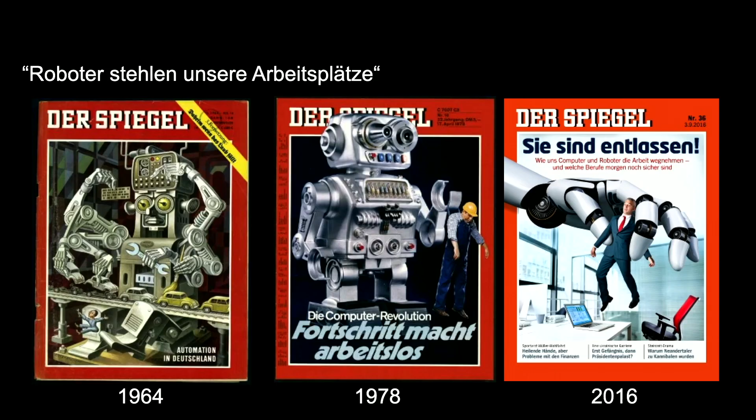I always like to show this picture because Jan Böhmermann had a show where he copied my picture basically, so I have to keep it in my talk. He was kind of not getting the actual content of the slide, meaning that we have been revolutionized and run out of jobs in 1964 by robots, 1978 by robots, 2016 by robots, and I think we all know this has not happened.

So there has always been this myth that we, roboticists, build machines that steal jobs. And I think it's very clear that robotics, especially this new age of robots, is doing a very different thing.

So we're having more the idea that instead of having the classical automation in the 2000s with humans being isolated, not being part of the machine world, now we kind of tear down the safety fences more and more. Obviously, it's not going as fast as we all hoped.

There is many things you could now criticize about standards and so on, and we all know that they are extremely conservative. There's also things that are not really how they should be, but I guess there's a lot of will to push that forward. And more collaboration, so cobots can come into existence, but in the end, what use is it if a cobot is not doing something new?

So what is this new thing? If you look at the industrial robotics chain over the last century almost, starting from Gargantua, then going into the industrial robotics generation, the first generation of position-controlled machines - obviously I have left out a lot of robots, so please don't be offended if I missed your robot.

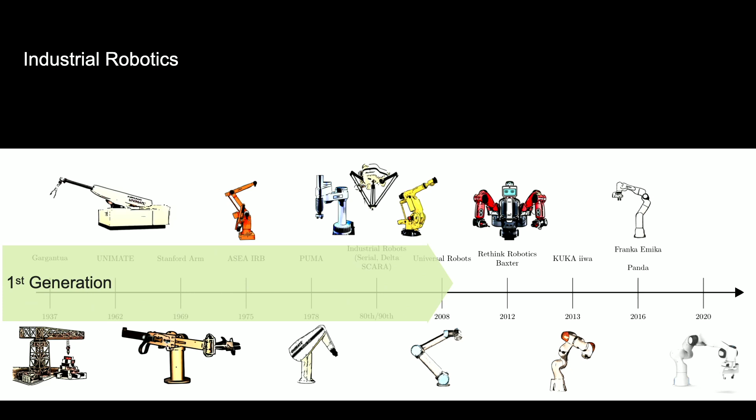It's really just trying to make a point, because I think we as a robotics community now have an interesting point in time, meaning we have the second generation, which we call cobots, so robots potentially interacting with humans, but still doing the same thing as before behind fences, and now having robots that really have a sense of touch.

Not necessarily human kind or human-inspired sensing, but the interaction with the world in terms of forces, in terms of manipulation processes, understanding how to contact the world, understanding how to manipulate the world, and understanding basically how to purposefully do the things that we as humans make so elegantly and so easily.

And this third generation of robots is what I call tactile robots. So it's not just anymore about building a system. No, it's about the software.

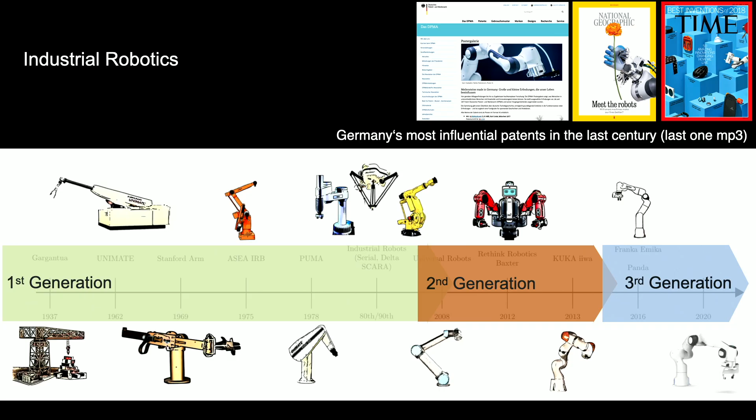So the new robots are much more than cobots, about 80% minimum software. So it's all about software now. So you have new sensors, but then you need this new central nervous system that becomes the largest part of the robot developments - truly embedded AI systems.

And obviously there have been many key influences in tactile robotics, ranging from the force control in the 80s and the unification into force impedance control about 10 years ago by us, torque control dynamics of Chris Atkeson and John Hollerbach. All the famous people in robotics in the 80s and 90s and 2000s and also in 2010 have really contributed to this enormous kind of journey.

Such as Antonio Bicchi, who just gave a marvelous keynote at the first ICRA we had again in Philadelphia just a few weeks ago, or Alessandro De Luca, Mark Spong, so you name it - all the really amazing and fantastic people who have pushed the field, and they were always dreaming not about position-controlled machines or cobots, no, it was about robots interacting purposefully with the world.

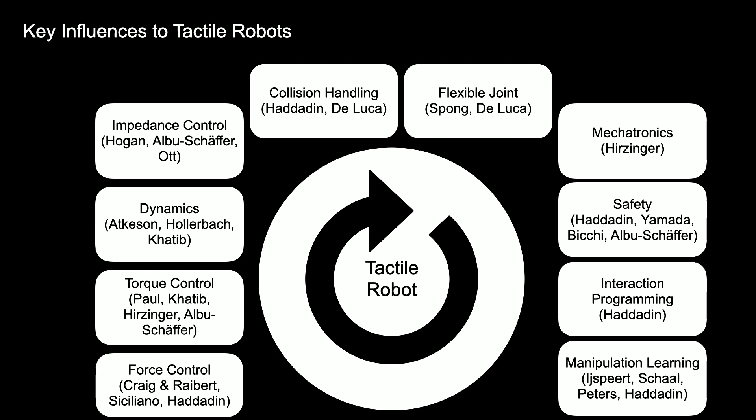And obviously safety is a big topic on that, but since I see that Björn Matthias is also here, we're going to have a discussion about the current safety aspects, maybe later on, so I don't talk so much about this today, because I think it's really about what we can do with these machines.

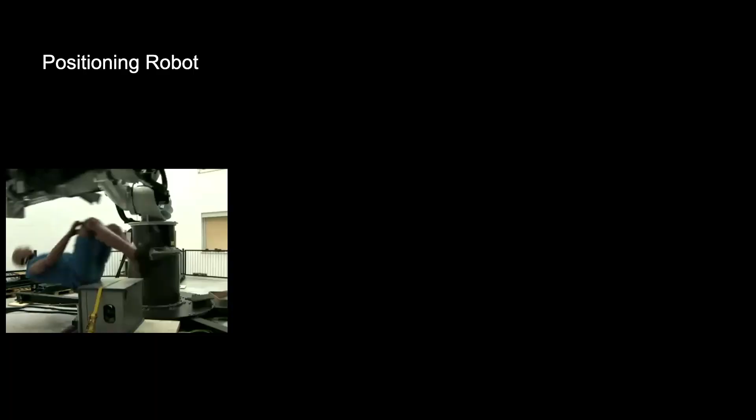And what I think is kind of interesting is that if you boil it down to one thing, I mean, classical position-controlled machines - there's some experiments which I did when I was still a student at DLR. So I had a lot of fun crashing things into, things. Lots of fun if you're there.

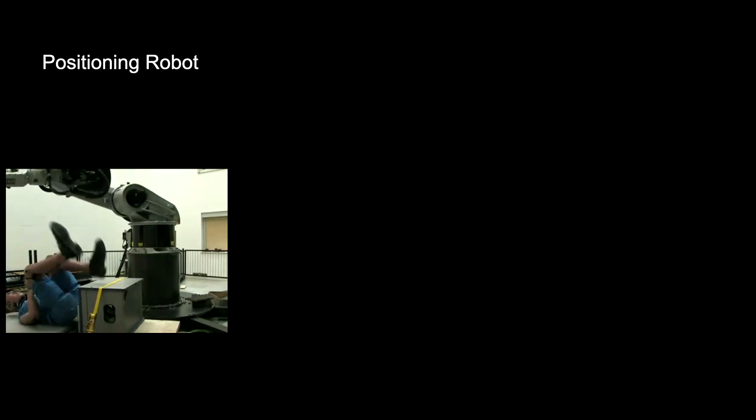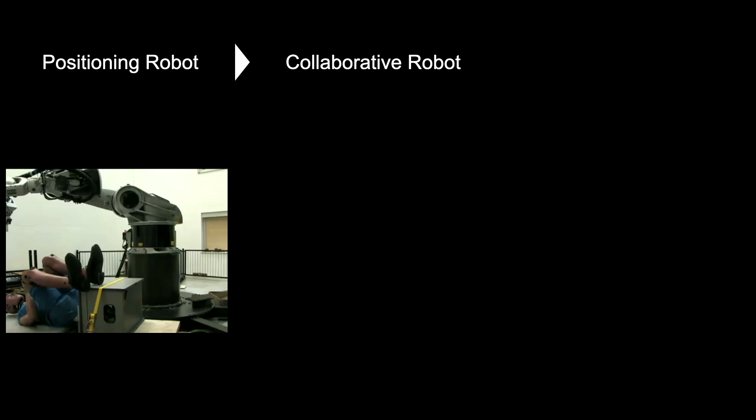You cannot convey the message so nicely if you just see a small video, but if you're there and a 2.5-ton robot crashes into a dummy, it's an interesting image and video that you don't lose over the years. Then you have the collaborative robots, which obviously have safety fences removed, but in the end it's not about tactility, it's only about safety. So they cannot detect the contact yet below a certain severity.

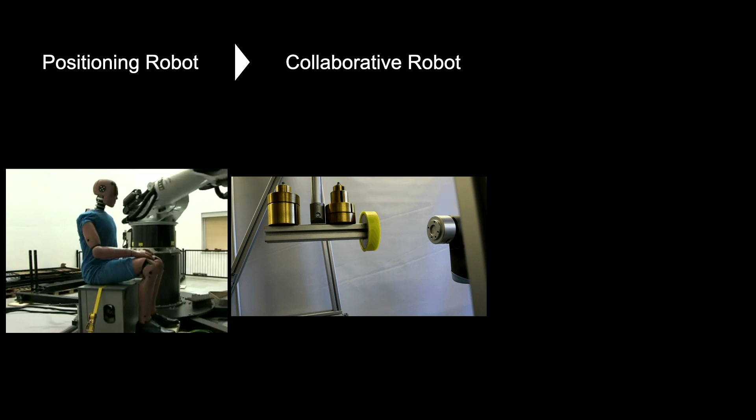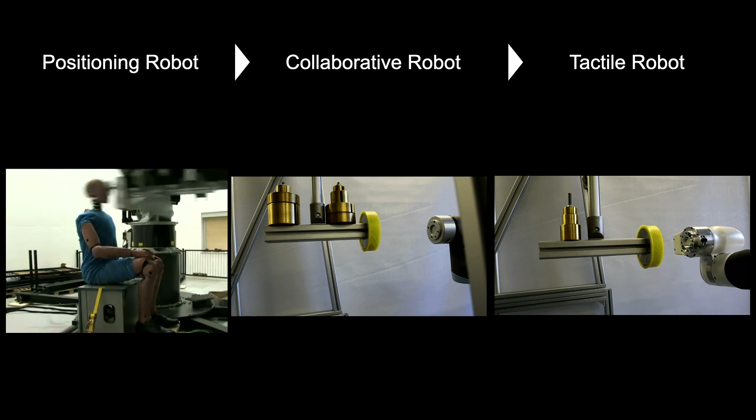And then comes this last generation of tactile robots with the sense of touch and the reaction, the central nervous system that can make sense out of force information. So it's not only about having a sensor, it's making sense out of the sensing, right? So this is, I think, really what we need to do: purposeful, controlled interaction with the world.

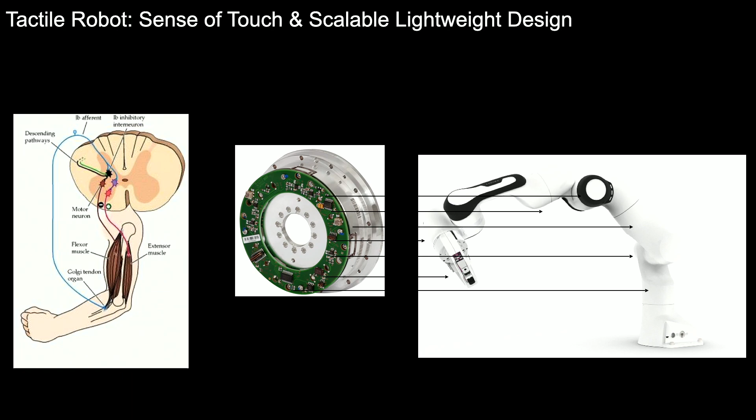As you know, many of us have been contributing to that, and one of the core things that we've been doing as a community, the idea was born in the late 70s and early 80s, is building torque sensors into the joints. Joint torque sensing has been instrumental to that, and it enables smart teaching at a level way beyond current control. It's feather-like interaction, several hundred grams instead of 17-kilogram motion. So you really have robots that you can take by the hand and show them something.

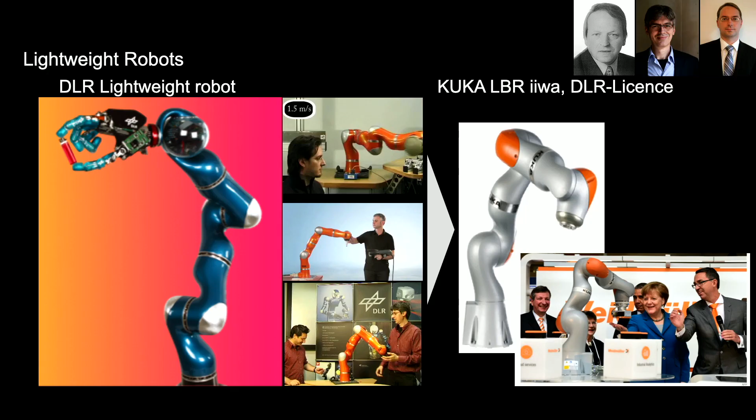Many of the things we've been doing back then at DLR were then, as you know, tech transferred to KUKA. It was about lightweight robot technology, torque sensing, and low-level control. This was the main thing we did back then. And obviously the safety aspects you see there, these original experiments where some PhD students had to put their head in the direction of robots to show that they are safe.

We are still not there that, in the real world, humans can broadly use robots, but I think it's more and more going there. And still, I would argue that we are totally overestimating the danger emanating from these super lightweight systems. Obviously, a 2-ton robot, or a robot with, let's say, 2, 3 or 4 kilograms of reflected inertia, that's a totally different animal, right? So I guess we're still on a road there.

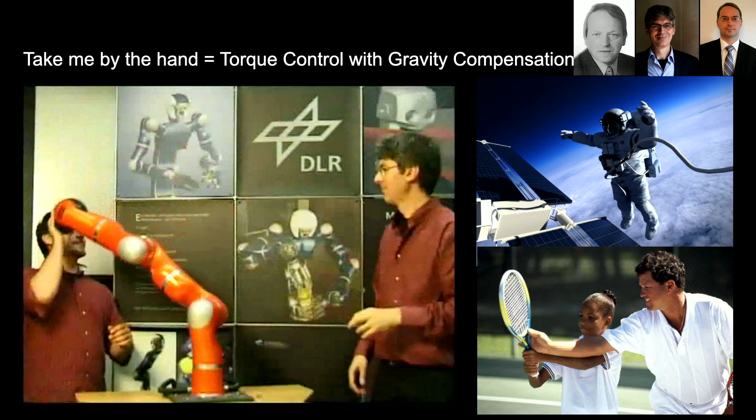And then we have been doing these ideas of torque control, robots that essentially float in space, right? You compensate for gravity, centrifugal and Coriolis terms, and then they become super smooth and very nice to guide. And then these things had to be continued into tactility. This was not yet tactile robots at all. It's only torque sensing, only gravity compensation. So torque itself is not a sense yet. Torque and forces are not yet being controlled in an elegant way.

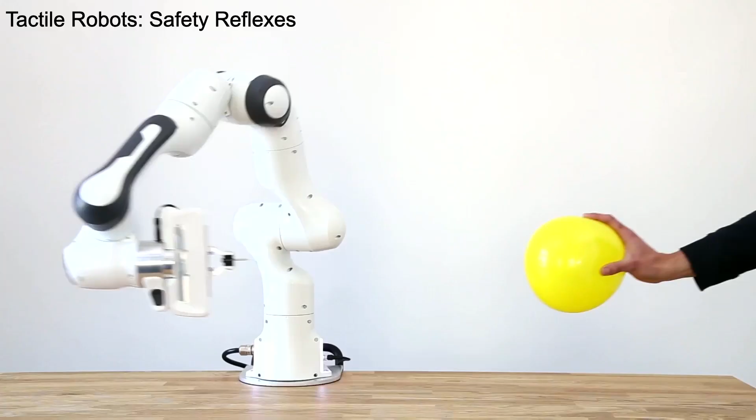And obviously the reaction is still very important. So how do you embed this into the safety cycles? How do you make robots so sensitive that, with these kinds of needles in the front, you can really detect and react to collisions at a millisecond level?

And these things together now with a sense of touch and super stable control methods make force interaction with the world really purposeful, so that regardless of the interaction material, whether it's compliant or very rigid, the robot is able to very accurately control a contact force. This is something that we as humans are not even able to do. So this is a superhuman level of force interaction that you could, in principle, do as a robot.

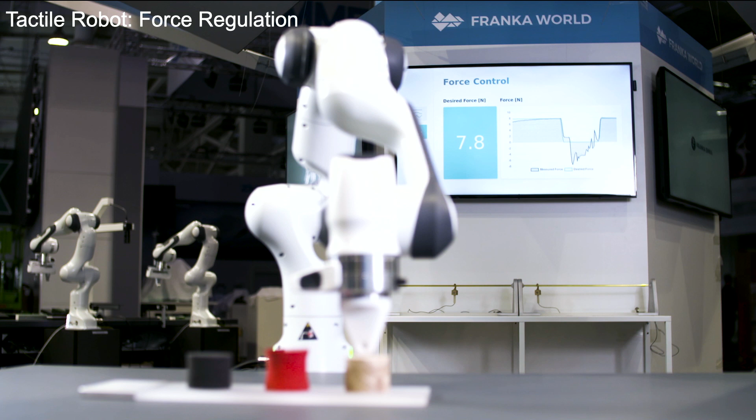So what can we do with these new ways of interacting with the world? It's not like in a computer game, only position control, where we try to make the robot a pure geometric abstraction; now we can interact purposefully with the environment. So we tell the robot to contact the environment with, I don't know, 7.8 Newton, and it can do it. The next thing, obviously, for a tactile robot is autonomous learning.

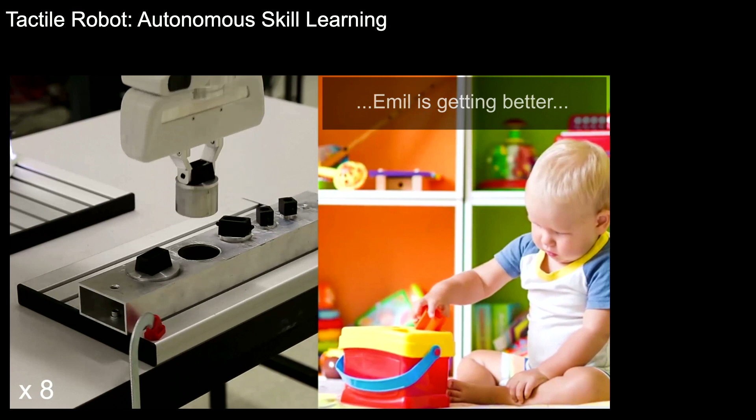So can we really make these robots learn the interaction with the world? Can we make them learn like our kids? I do all kinds of experiments with my kids. I will not replicate what I've been doing there, but I've got three, so it's kind of nice. You can see repetitive patterns there, and these ideas can really be brought into algorithms.

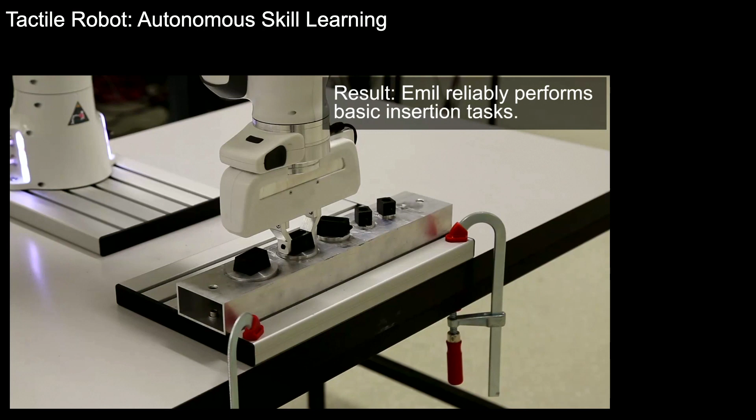What we've been doing is really trying to fuse human-inspired motor control schemes with machine learning to make robots able to solve quite ambitious peg-in-hole problems with industrial clearances. Very hard to automate that. And the robots are able to learn these things autonomously. And obviously the next question is, can you transfer it? Can you transfer knowledge from one task to another one? And this is an experiment I've already shown a few times.

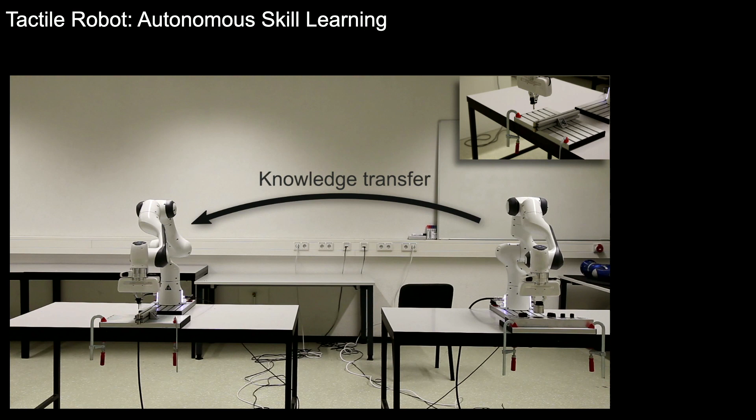And yes, you can do it. You can actually use a program you learned before, and just within seconds, the robots are able to autonomously acquire the ability to put the key into the hole. And believe me, if you don't do it with these kinds of methods, it's actually quite hard, which I'm going to show you in a second.

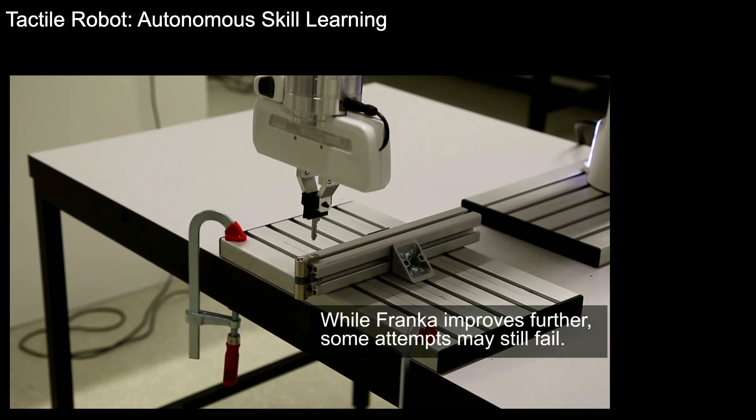And then the other thing that obviously has to be brought into attention is this extremely important aspect of making robotics accessible. And not only teaching, but programming should be, I like the idea of this no-code program that was brought up, I think, by Wandelbots in Dresden, at least as a catchphrase. And I think we introduced in 2016 at Hannover Messe basically the first system that was really able to do that.

So can you do this not only with pick and place, but really force sensing with manufacturing tasks, assembly tasks, and so on and so forth. So there's really the big ambition to have robots being able to do quite complex assembly tasks and then let them be programmed or used by anyone, essentially.

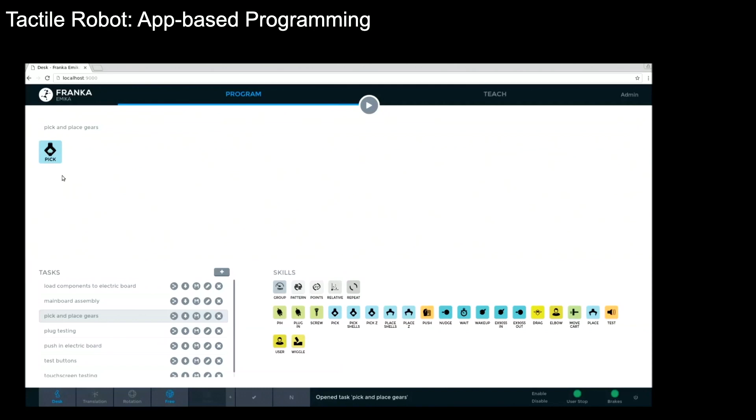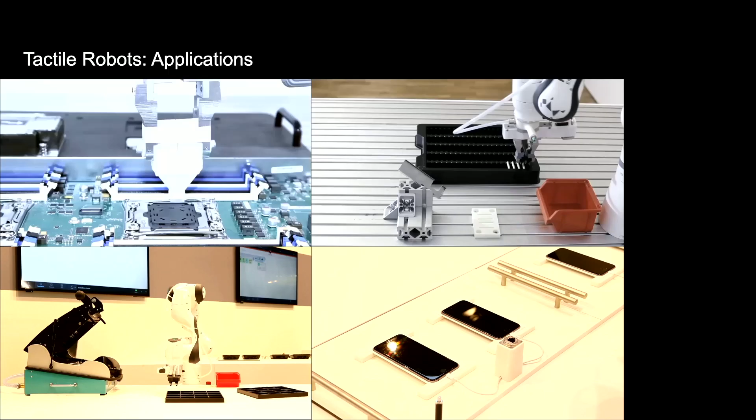So the revolution we see here, we could say that vision is important, yes, but if you see the volume of the hand, it's kind of clear that manipulation really relies on the sense of touch and the central nervous system. And these ideas could be used to do all kinds of things that could not be done before. And now you see all kinds of robots, this next evolution of robotics. And what is interesting is that many new things are possible: electronics manufacturing, assembly, testing, you name it, and also other applications we have all seen over the last years.

Okay, and then what is really interesting is that robotics has surfaced from very specialized industrial-level machinery into systems that large-scale corporates are using in order to further progress in their machine learning world, in AI. So this bridge between machines and machine learning is, I think, really happening now. And that's really where I think this revolution is coming from.

Our machines can produce not a lot of data, but high-bandwidth data at very high frequencies, right? So we always say that it's very hard to generate data in robotics. Yes, because the robot first needs to be able to do something, and if you don't know yet how it does it, then how do you generate the data to do it? So that's the chicken and egg problem we have there.

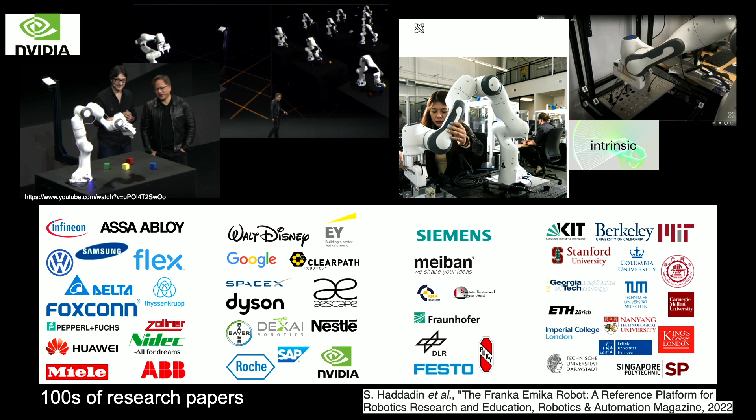And what is really interesting is that now more and more companies all over the world are using these next-generation systems. At ICRA, if you went there, you have seen that essentially the community has been converging towards this next level of tactile robots being the reference in robotics research and also in industry. Okay, so coming back to what it is good for. Why would we need a generation 3 and then 4 and 5? What is it good for?

I think it's clear that the classical robotics world, and this is obviously not a complete list, but it gives an idea of it, has been pick and place, spot welding and painting. The second generation has more and more come to rough teaching, at least of some positions, and then machine tending. This has been a great game changer in robotics. But now with the sense of touch and all these new ideas of robots being smart assistants and being programmable by anyone, you are the one who is using a tool.

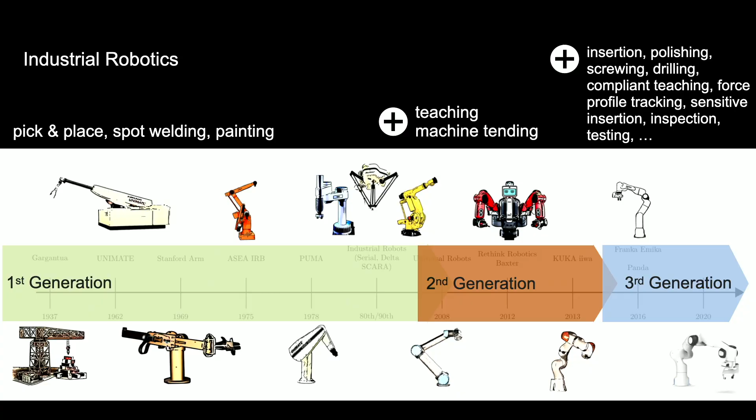It's not anymore the machine telling you what to do, but you as a programmer, as a user, can essentially have a very interesting toolbox. It's a smart toolbox. It's not just a hammer, it's an entire set of tools that tries to support you, which I think is an amazing transition we are seeing in robotics, moving away from classical machines to smart assistants, not only in our labs anymore, but really in the real world, which is a big transformation we see at the moment.

Yeah, and then I think what is really nice is, wait, I actually want to jump over that. Sorry.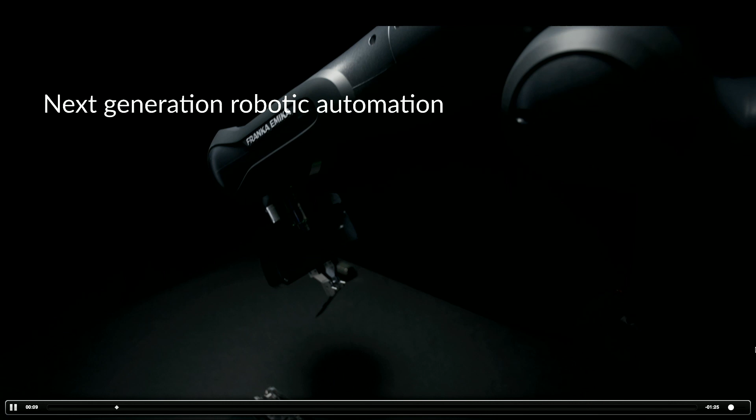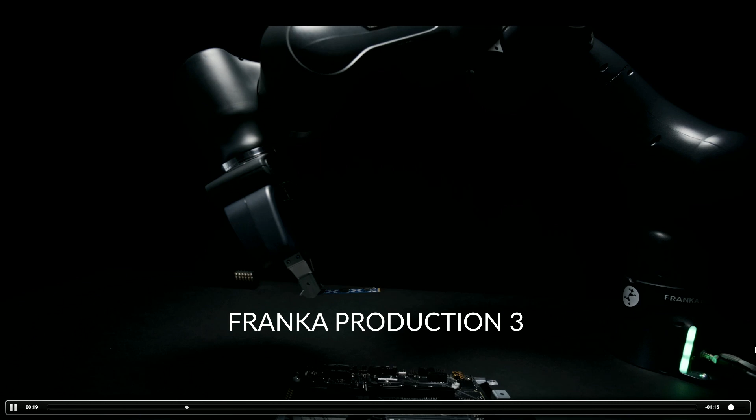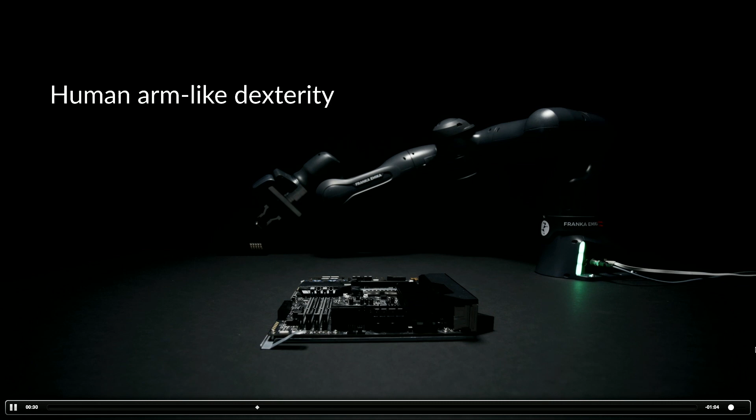Is basically that these systems now can be really used for all kinds of things. So obviously what is kind of super interesting is that we do all that stuff in industry, in small and medium enterprises, but I think what is actually really important is that these robots are not only doing all these things, as for 3C manufacturing, obviously now with the first certified tactile robot being the Franka Emika system, but really the idea of these systems not only being done for one thing, but more and more people use these kind of new robots for things that we as classical industrial, let's say, thinkers or technologists were not thinking of.

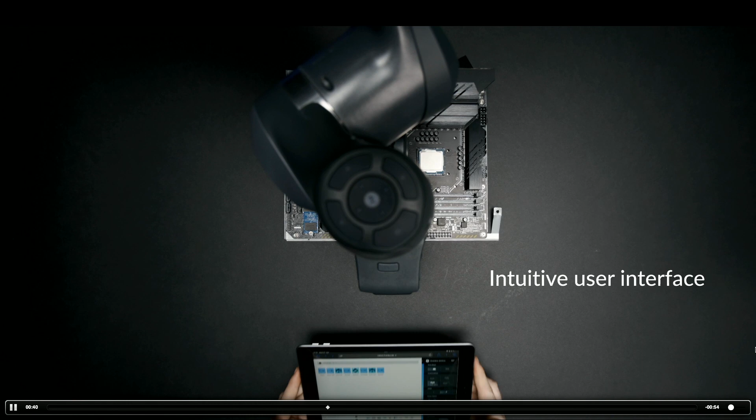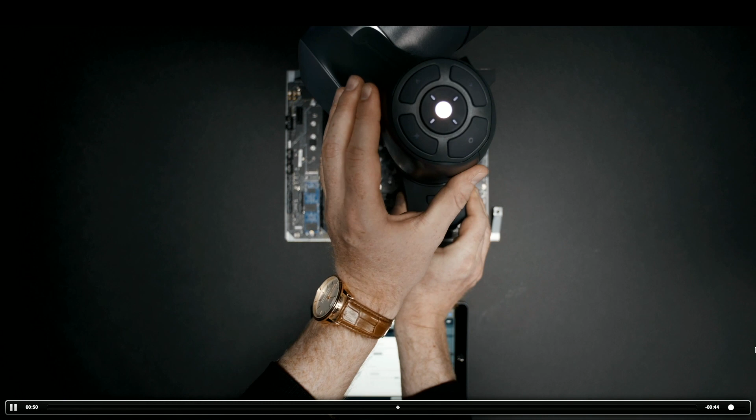And obviously this idea of bridging the digital to the physical world, I think, is really one of the most fundamental transformations we've seen in the last years. Obviously, this kind of comes with lots of potential. So why did I say this is a toolbox? Because obviously you have all these purposeful, very sensitive, gentle and safe interaction between humans and robots, the connection to the app world, and so on and so forth. Obviously, safety being a very important aspect. But what I think is really cool is that next to the industrial level certifications and so on, these enable things that we all couldn't think of.

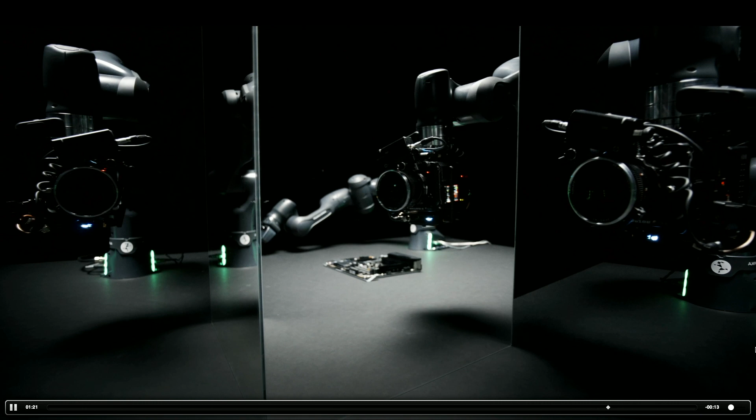So this movie, for example, has been fully done by a movie maker by using robots, right? So he's teaching these robots and interacting with them. So the robots are now basically being a tool for the movie maker to do a movie. I mean, how awesome is that? And these things you can see more and more. A Swiss cheese maker is using robots for making Swiss cheese. A very famous guy in Switzerland, I heard, at Davos, right? So it really comes into the first role in order to really bring robots to human spaces, and especially to people who are not industrial only.

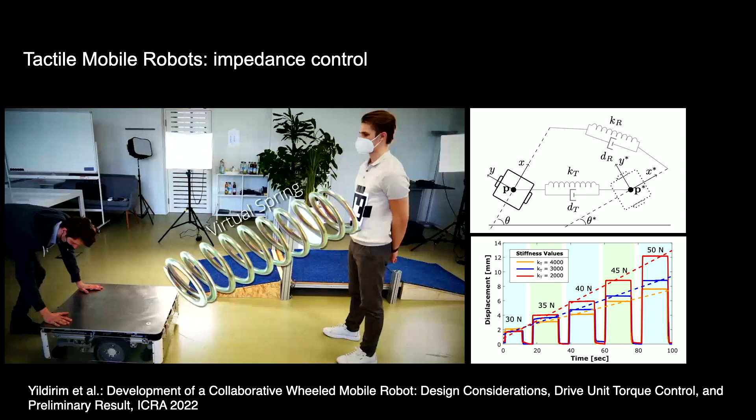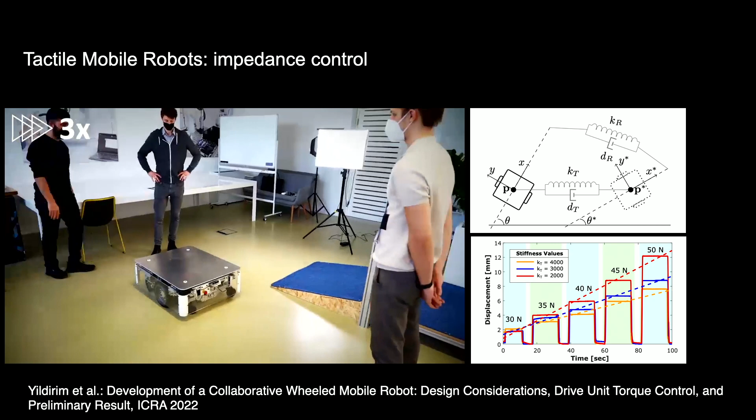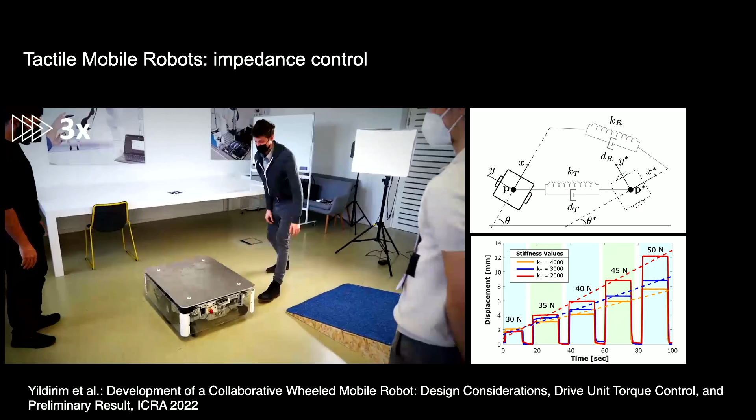And I think another aspect that we see now, I'm always being asked, so why do you need this only for arms? Could this be useful also for other things? Yes, I think it's useful. So impedances, compliances are not only useful for arms, I'm pretty sure about that. This is something we just published at ICRA, just a few weeks ago, the first mobile base that is truly tactile. So all these tactile ideas brought to mobile systems. So there are no bumpers or anything. It's really compliance-based robot systems, active compliance control, impedance control, and also these notions of collision reactions, reflexes.

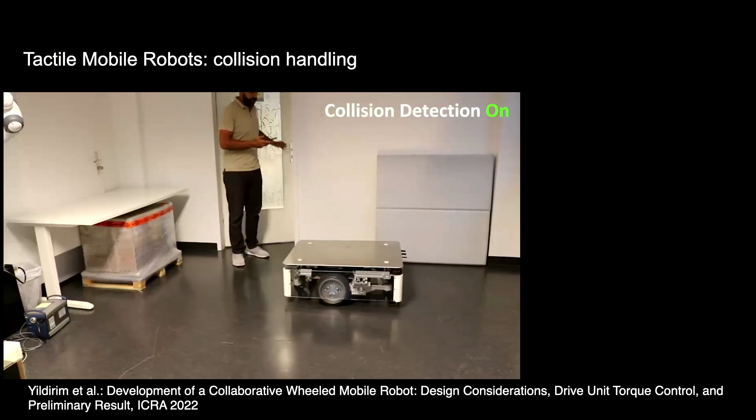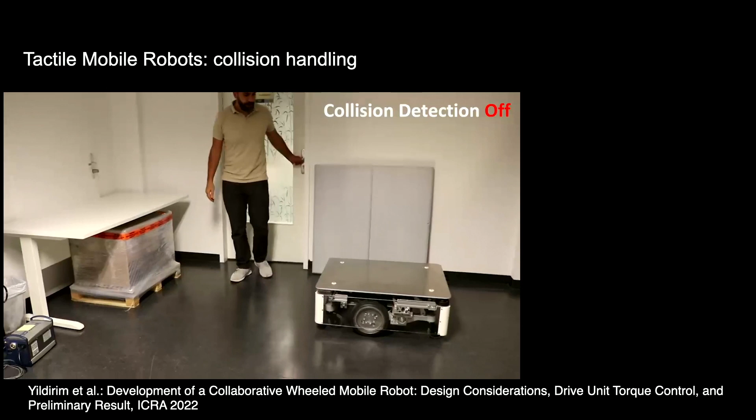So basically, I guess we all want to have a mobile base that is able to do that, right? So without a bumper, just with internal motor control, torque sensing in the base, torque sensing in the drivetrain. And obviously, if you want to go to human spaces, this should not be happening. These systems are very strong, but in the end, we would rather have a system that is able to gently interact with us. So let's also be aware that if you want to have mobile robots in human spaces, it's the same thing as for arms, maybe even more important.

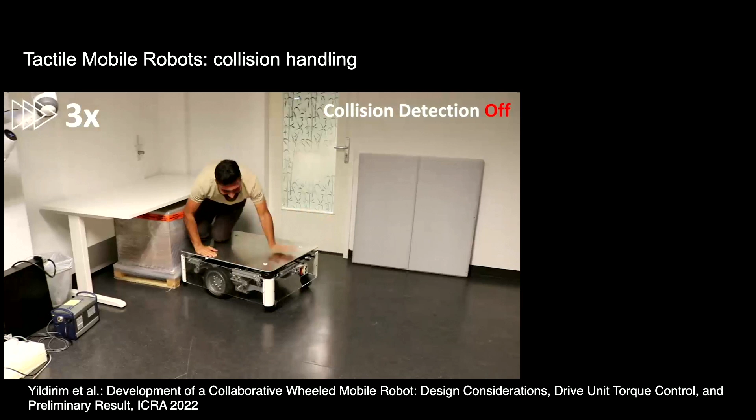Okay, so one thing that I guess is really important with this next level transformation in robotics, and why I'm talking about cobots and then tactile robots, is to objectify and benchmark this jump, right? So we always talk about position accuracy and repeatability. In terms of assembly processes, this is not even close to the most important benchmark, obviously. We want to objectify how systems purposefully interact with the world. Can we quantify that really objectively? So if you come from an industrial process that you want to solve, you want to have a set of automatable tasks, then come the task and safety requirements, safety today not being the main point of my talk, and then the technology specs and the selection of a robotic system, right?

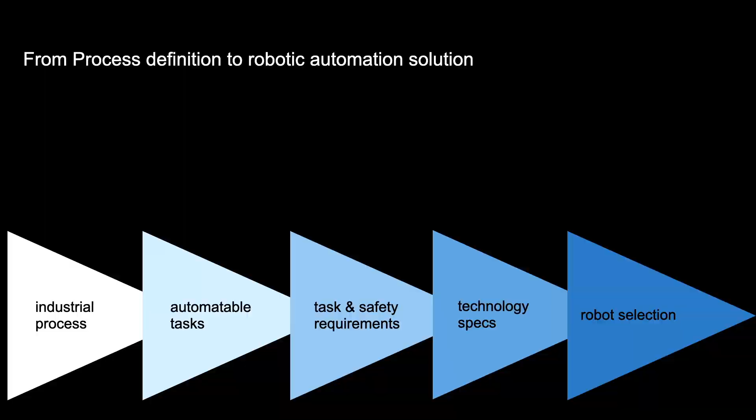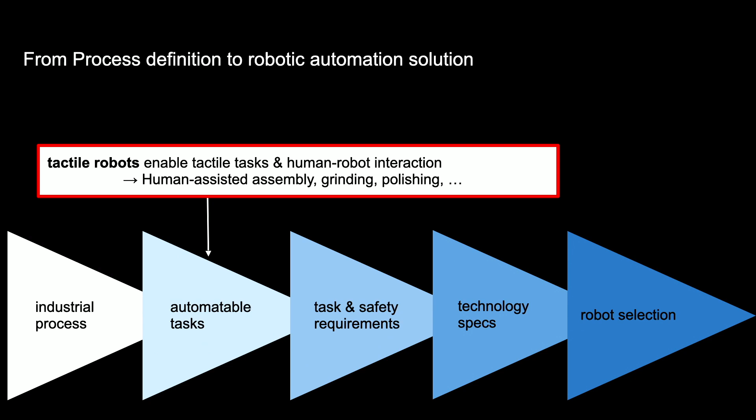So how can we do this in the tactile realm? How can we do this in the teaching realm? Can we actually define and propose, first of all, benchmarks and really tests that quantify the quality of these kinds of professions? Similar to position accuracy and repeatability, we need the same thing in collision reactions. We need the same thing in contact awareness, and especially when we talk about trustworthiness in human-robot interaction, trustworthy AI. People care about these things very, very much. So I guess it's clear that these tactile robots are now enabling fundamentally new processes, so we need to be able to objectify what these systems are able to do. So how do we compare these robots?

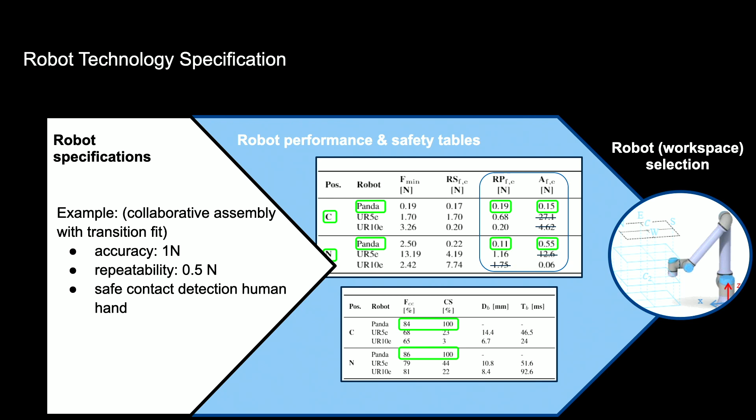So for example, if you want to have a robot that is able to insert collaborative assembly-wise with transition fits, and let's say the specification says 1 Newton force accuracy and 0.5 Newton repeatability, and safe contact detection with the human. So how do I come up with a robot that is able to fulfill all these specifications would be the fundamental question we ask.

So I seem to have music everywhere. Sorry for that.

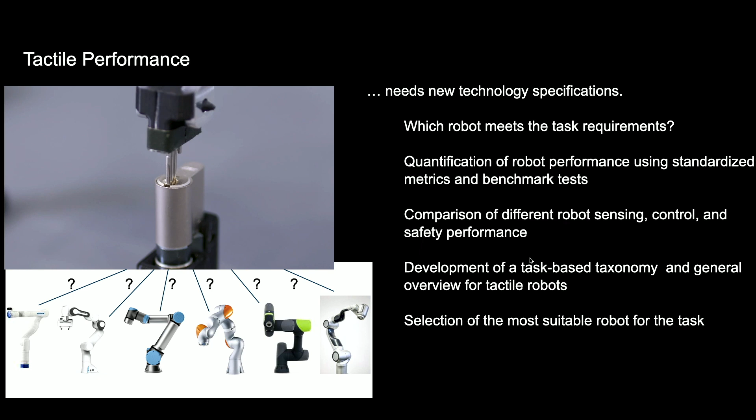I think what's important is now that we see more and more robots doing this, we call them all cobots, but I don't think that's really what's happening. We should make sure we understand that all these systems look like arms, but in the end they can do very different things. And what are these things that they can do, and what can we do with it? What kind of processes can we transform?

So we need to understand how task requirements converge into benchmarks, and what kind of benchmarks are useful to quantify these transitions, especially if you want to go to processes like assembly or insertion. These are things that could really mean big scaling, especially in times where reshoring and scaling for small and medium enterprises becomes very important.

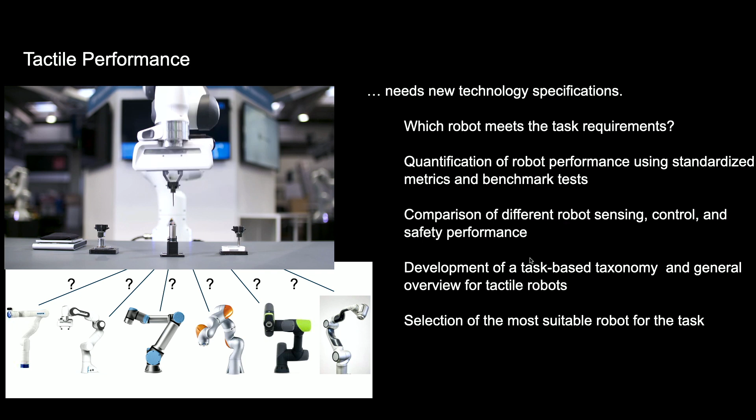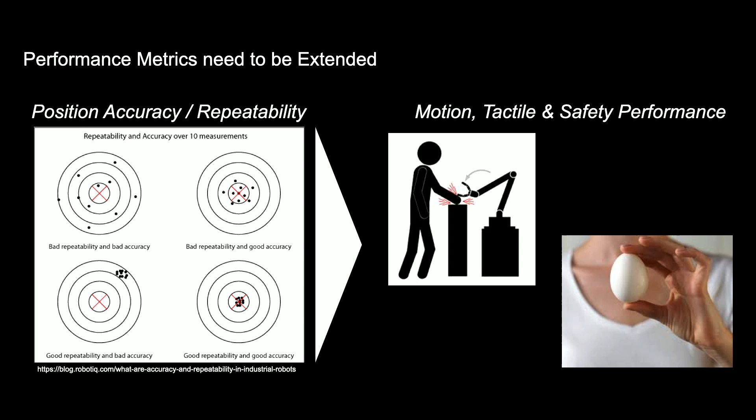We all know position accuracy and repeatability, right? This has been in industry for decades and has been standardized. But what happens with human-robot interaction? What happens with tactility and manipulation processes? What is the analogy in motion, tactile, and safety performance? Shouldn't we specify and benchmark them as well? Otherwise you can never choose the right robot for your task. So how do we do that?

Something we've been proposing is a set of tasks and benchmarks just recently published. So for objectifying force accuracy and force overshoot - if you want to grasp something and apply a force, but the overshoot is too large, I think we've all tried this with eggs, for example. It doesn't bring you the egg back - it's broken, so we need to be able to control that.

And then obviously the maneuverability. I don't know how about you guys, but if you teach with a robot, there's certain things that can go really well, and sometimes teaching is really hard. So how can this teaching ability be objectified?

And then obviously in the safety realm, the constrained collision forces. We all know TS 15066 and the requirements, so these forces should be objectified and benchmarked. We need to objectify the contact sensitivity - given a standardized collision test, can we actually objectively compare a robot's capability to react to such a collision? This is equally important for manipulation, because braking time and braking distance matter not only for safety but to quantify and objectify manipulation performance, since in manipulation it's more than just a safety problem - it's a manipulation problem.

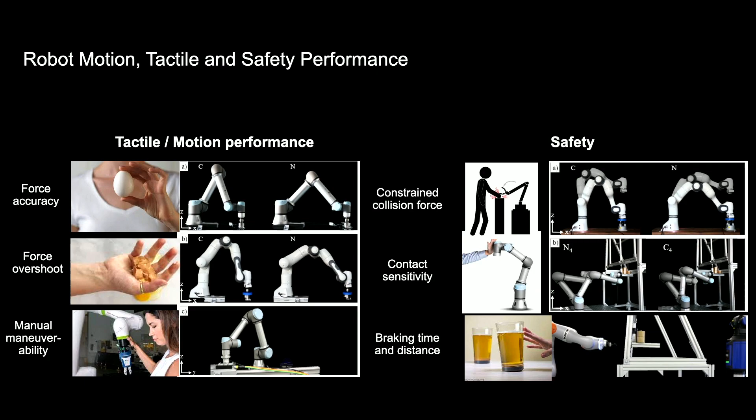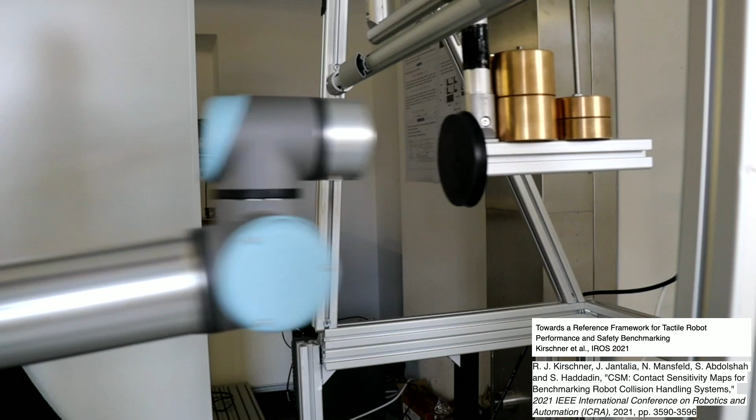So just to give one example: contact sensitivity should be objectively rated independent from the robot itself. The easiest thing, if you think like someone who really likes physics - there's mass and velocity, that's momentum, that's energy. So why not just say there's a pendulum with a mass, the robot comes with a velocity, and the question we ask is, given the environment of the system, can the robot detect a collision and react to it in due time? Very simple, very objective test, nothing there to trick.

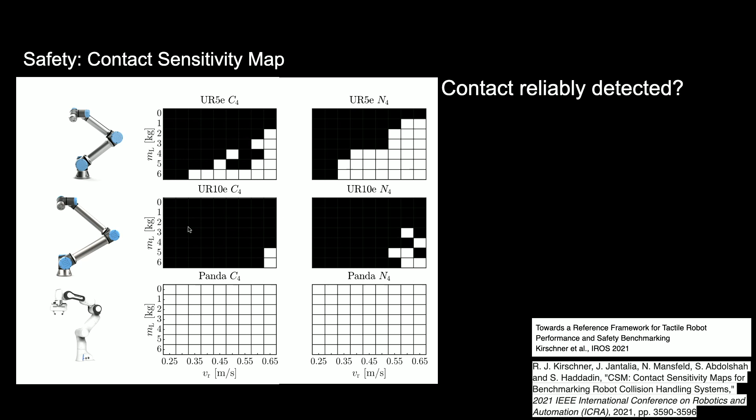So if you do these tasks and compare them, it becomes very clear that we are not anymore in the collaborative robot space, but there are now robots with next generation abilities, which we call tactile robots. In these tactile robots, if you look at collision speeds and collision masses on the pendulum, the question is if it's black, it didn't detect the collision; if it's white, it detects the collision. I think it's very clear that in human-robot interaction safety, this should be very important for a robot collaborating with humans, especially if you do manipulation.

Okay, same thing with the constraint forces from TS 15066. We just recently published all that work at the International Conference on Intelligent Robots and Systems, comparing various benchmarks, and we're releasing at the moment a set of full benchmarks in order to compare all these robotic systems - and there's more and more coming.

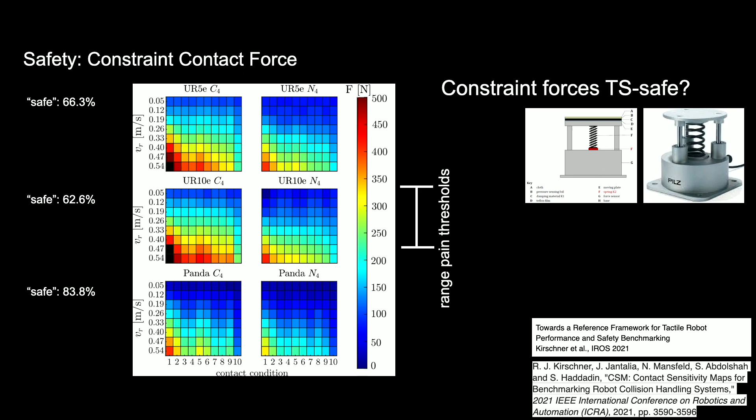We see new robots coming everywhere, which is amazing, and I think it would be so cool to really be objectively able to compare them. Right, then next level, what comes now? And what is also part of this whole tactile robots revolution?

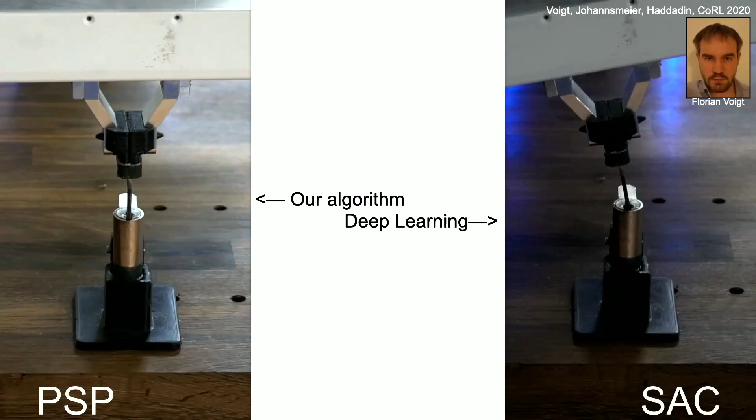It's really the ability to learn, and not to just look at deep learning and think it's an amazing thing for robotics. No, it's not. It's an amazing thing for computer vision. It has transformed computer vision.

But if you compare deep learning and state-of-the-art deep reinforcement learning with new kinds of algorithms that go to this next level of machine learning, which we call collective learning, a marvelous thing happens. We can solve these things with learning methods that are not only faster than standard deep learning by orders of magnitude, but are actually able to learn these extremely difficult tasks without any prior knowledge, except for the fact: bring that key into the hole. The robot just learns within a few trials.

No programming involved. And if you try standard deep learning—and I'm sorry you cannot see it very well here—you try really hard, and we're not even able to train the system for weeks to converge to the specific goal, unless we gave it boundaries so narrow that you essentially solve the task already by hand.

So it just takes 5 or 10 iterations—a matter of 20 seconds—and the system converges. If you take the deep learning approach, it converges too, but the problem is all the standard algorithms of reinforcement or deep reinforcement learning at the moment converge to not being able to do it. So we were really not able to use standard deep learning to solve robot manipulation learning.

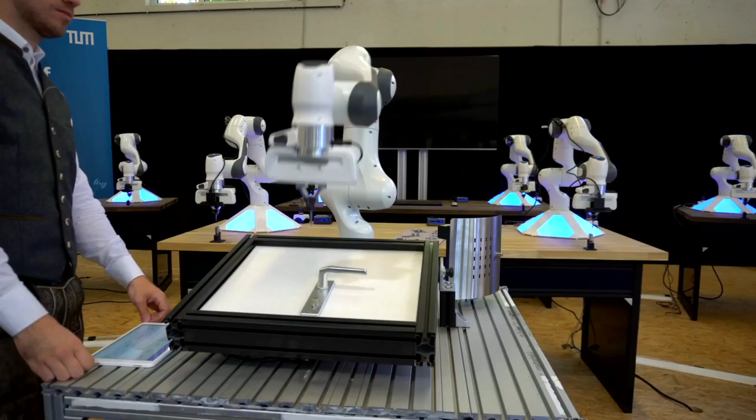So is it a surprise? I think for robotics it's not really a surprise. Why? Because interaction is not just a pipeline. And this is exactly what we scale tremendously with what we call collective learning—this basic idea of having robots that are able to learn how to interact with the world, learn how to manipulate.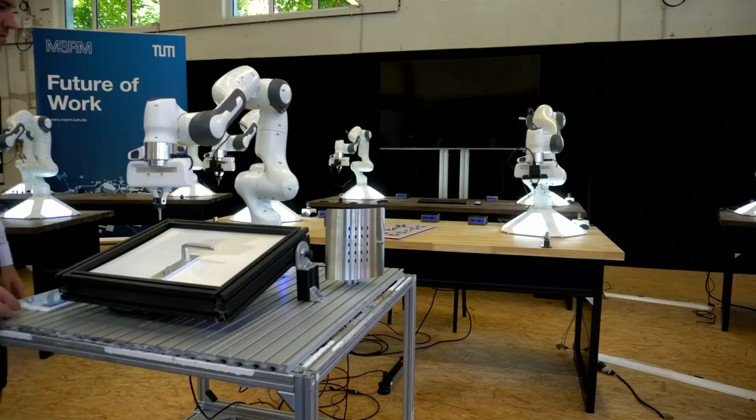Next question: we are in an age of 5G interconnected networks and so on—I hear 6G is coming. We have great interactions with Dresden here; Munich and Dresden are working on a 6G-life project together. So what happens if we now connect a lot of robots with each other and let them learn from each other in real time? Can we even go beyond what I just told you?

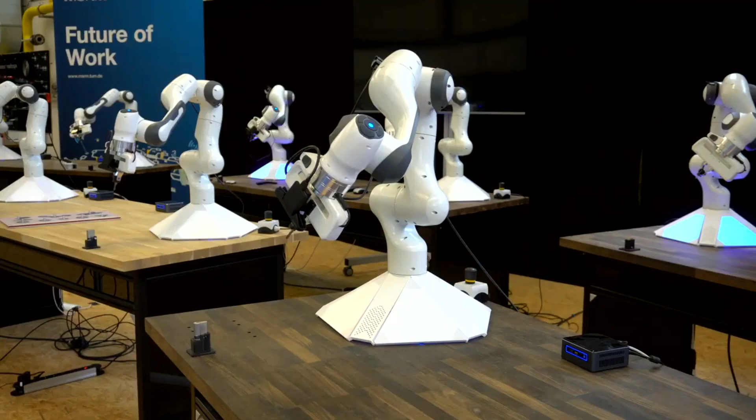Can we, in the limit, go to single-shot learning? Is it possible, within an instant, to basically learn a task? Obviously this has limits, but look at what we're doing here: the task was essentially that the robot—this one—is supposed to try to get the key into the hole. Obviously it's a newborn robot; it has no idea what it's doing.

And now it's kind of asking its siblings who are sitting here in the cloud. This is the digital twin being implemented, collecting the knowledge from all the robots. By the way, every robot has a different key, a different gripper, and a different location—it's never the same task. All the robots are collecting this information at the same time and learning: if it's green, it worked; if it's red, it didn't. So at some point the red stops growing, and green takes over—optimal robustness and solution of the task.

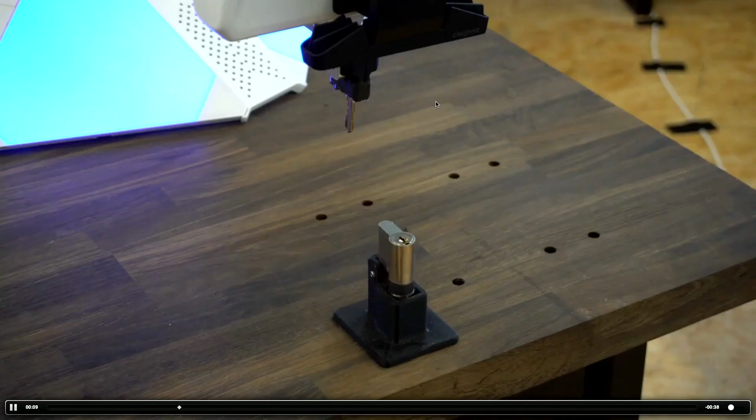An interesting thing is, within a matter of seconds, you can see how the first robots are still not successful in doing the task, but then the first ones, within just 1 or 2 iterations, are successful. After iteration 2 or 3, the first robot is really able to insert the key into the hole basically from scratch.

And then, next question: can the robot in the front insert the key into the tilted platform—a task it has not been taught—on the other side, and with a different key than all the other robots have been using? And can this be transferred?

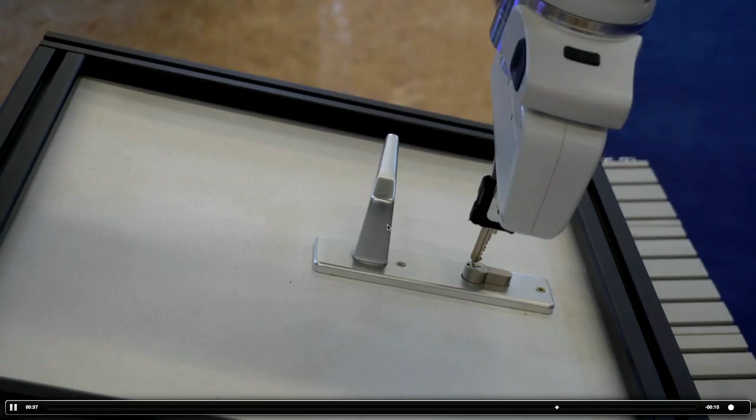And the transfer should be only geometrically. And the answer is yes, the robot can do it. So the robot takes the motor control program it learned from all the other siblings, inserts it into the hole, and is able to do it immediately. And then obviously you could still improve.

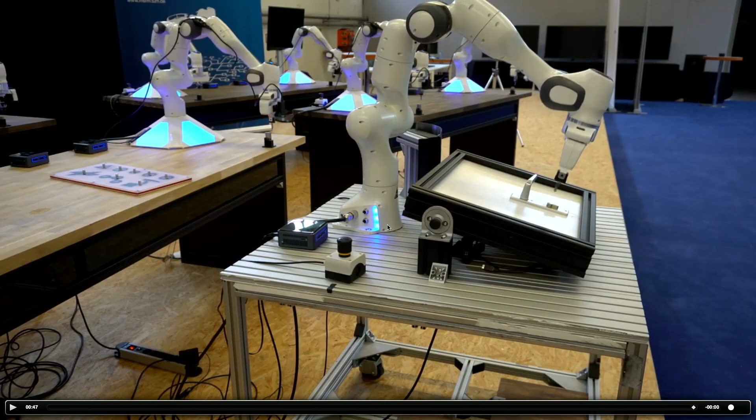So how can we bring this even further? We talk about sim-to-real transfer, right? So can we actually bring this now to manipulation processes that are learning in digital worlds? These are physics simulators. And we always hear that from physics to reality we can do the transfer. Well, to be honest, it has quite limits because simulating reality, let's face it, it's not just possible. We all know that.

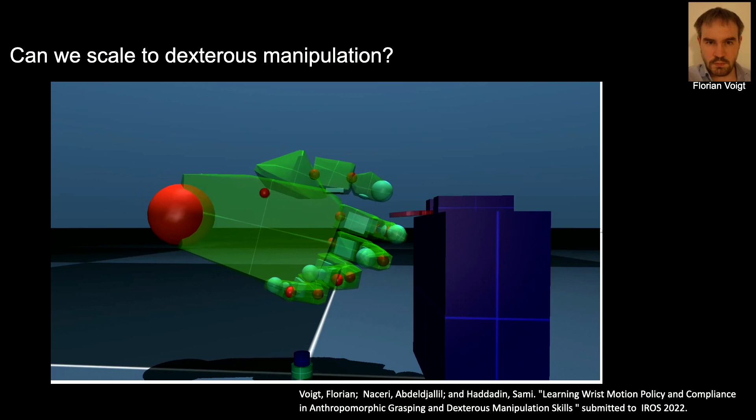So processes are complex, but there are certain interesting abstractions we can do. We need to find the right abstraction to be able to simulate the same processes, like the key into the hole, in the digital world. And can we do this with a transfer to reality? So where are we there? What I show you here is still unpublished stuff, but I think it's interesting.

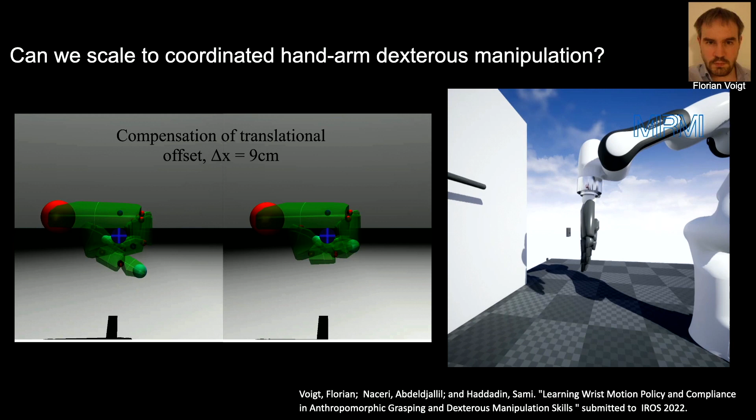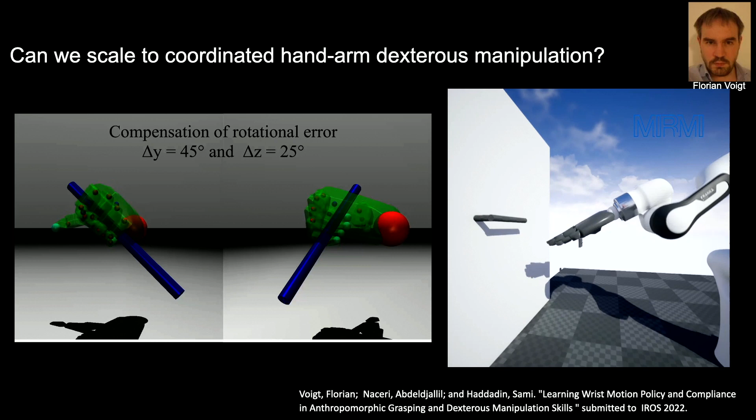On the left side, you see an arm trying to learn the right impedances to be able to grasp a door handle that is in an unknown position, nine centimeters off. So what is the right impedance to glide into the contact? The robot does not yet know exactly where the handle is, and it learns the right compliance in the wrist and the forces to be able to do this.

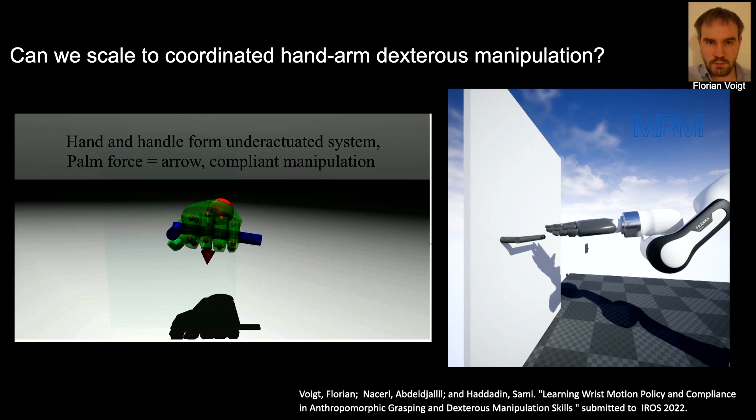Interestingly, if you do this in a simulated world, which you can run anywhere, say overnight or just before the other robot is doing something, and then you transfer it into reality, the recent results show that in reality, we see here the humanoid Garmi in Garmisch-Partenkirchen trying to open doors in our apartment there, and the robot is now using exactly the program it learned in the digital world, in the physics simulator, and using it in reality, it's immediately able to open the door.

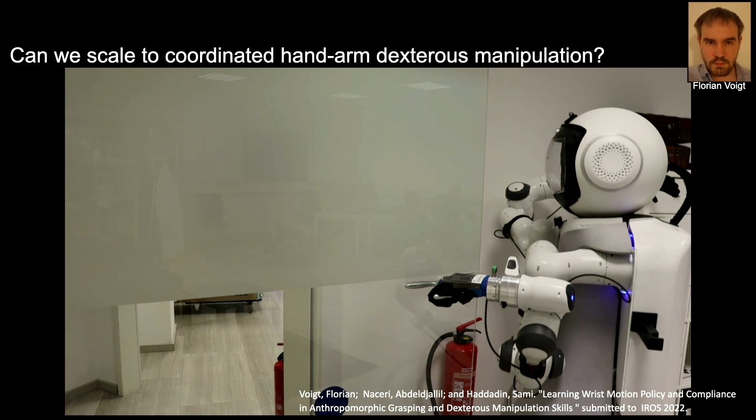So I think this is showing as a first step that we can really do the extension of robot machine learning into the physical world, and vice versa. So the initial step has to come from reality, then get it back to the simulator, and then use this kind of physics-grounded, reality-grounded simulator to then leverage all the huge data you can use there.

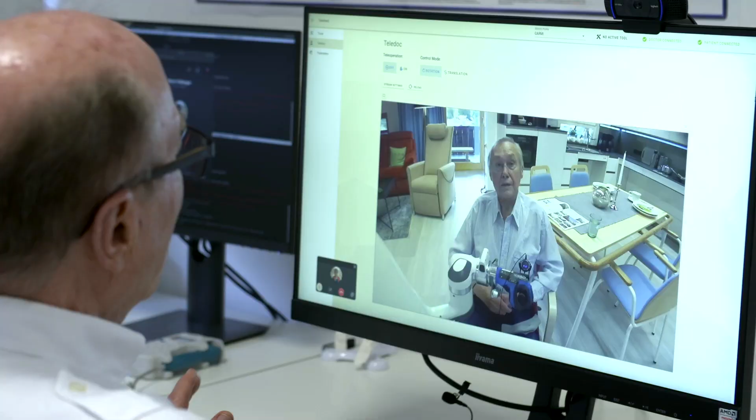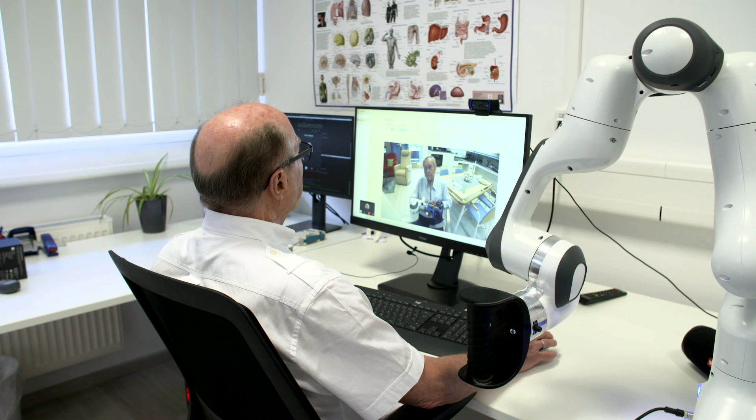Why is this important? Because now we can really think about aspects that have not been possible for robots. We talk about safety, yes, that's one thing. We talk about cobots, okay, that's no safety fences. But if you want to do teleoperation with force feedback for the elderly, for example, something in the pandemic would have been a major contribution of robotics to this crisis we have seen.

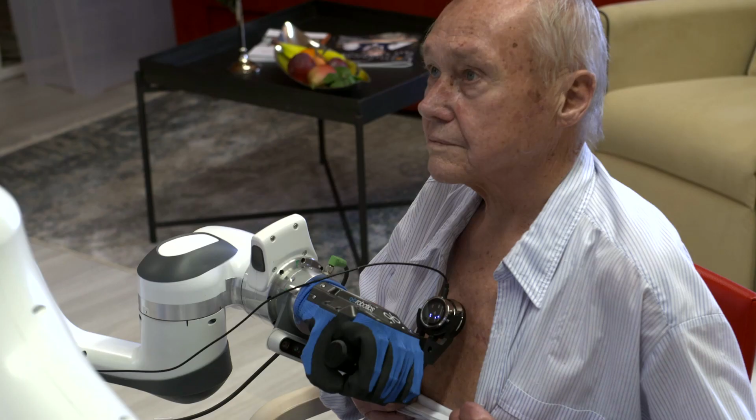So think about the lockdown of the care homes, right? Think about if you could just, as a private doctor, enter into a robotic avatar, use that force feedback channel to then do all the standard diagnostics that a typical doctor does with your patient at hand. So this would have been a tremendous change.

So I think this interaction of humans and machines, not only over physical spaces and digital space, but actually over space and time to some extent, is something we can really leverage over the next years. So this is something that has become reality and really can be used in the real world.

And what is also, I think, super interesting is that these kinds of things really bring automatica to the next level. So yesterday we had Minister President Söder here with us. He was opening the high-tech summit of Munich, and he was wandering around at automatica, and I think he was quite amazed at what we as a community are doing.

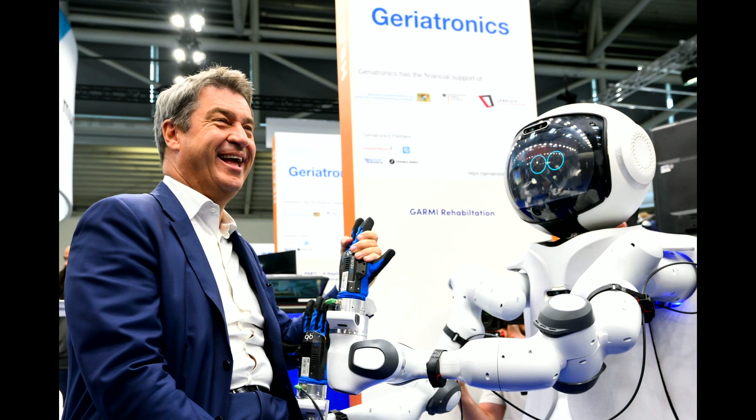So robotics is not anymore only industry, it's coming into the real space, into our real world, and this brings all of us together, from basic research to translation, being able to do these things in the real world, not only in industry. I think that's super important for all of us, but I think the health sector and others can now tremendously benefit from that.